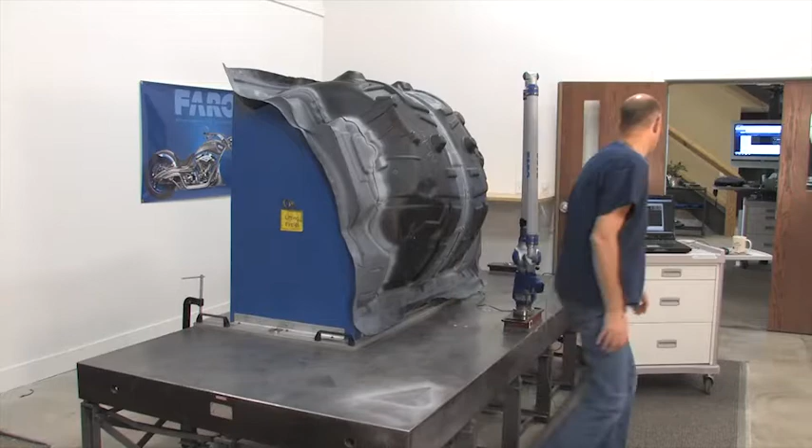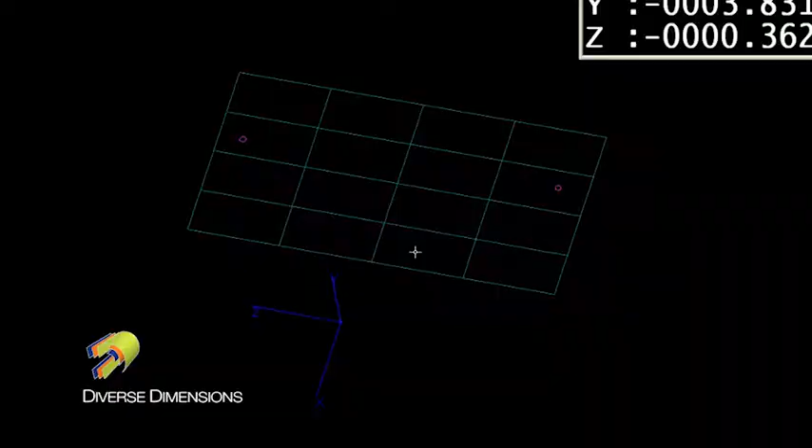Now notice on my screen here, I've got my plane measured, and I've got my hole, and I've got my slot. But notice the trihedron over here, this XYZ. I'll zoom around here a little bit just to show where that's at. That is right in the middle. If you can kind of see that right here, it's in the middle of what I've measured so far. Of course, it's the arm. It's the coordinate system that comes with the arm. CAM2 says it's the world. But what I want to do is I want to set the world to be the origin that the robot's going to see. Okay, so let's walk through that in the software here.

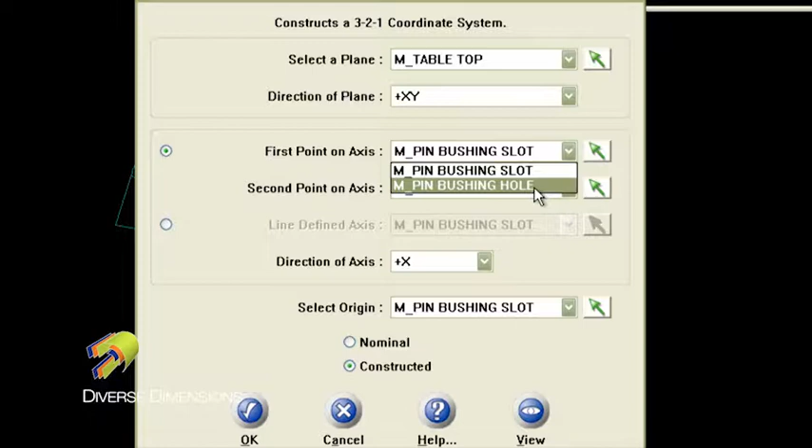If I go up to construct coordinate system, and then I run to 3-2-1 right there. What I do first is I select my primary as being the tabletop, and then I turn on this radio button right here. This second area, this dialog box, will show how we're going to set up the line, or the 2 component of the coordinate system. So what I'd like to do is I'd like to set up an axis through the hole and then through the slot, and I want to call that my plus X direction.

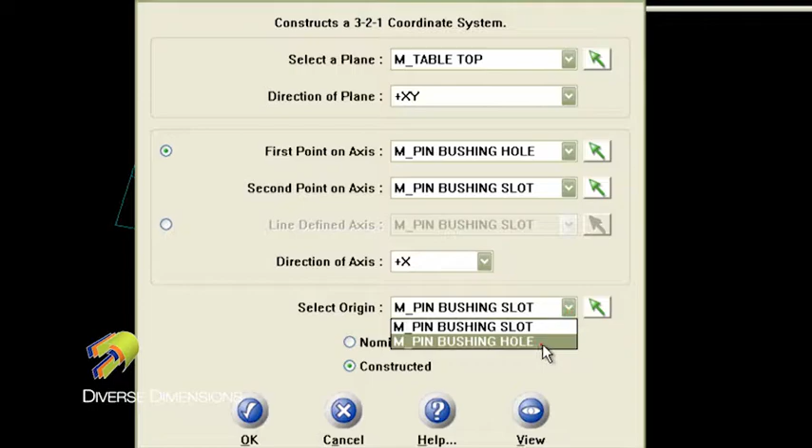I've got all kinds of options for that. But what I'd like to do is say that the hole on this side is going to be my origin, and the axis is going right through to the slot here in this direction being positive X. And then I would set my origin to the hole on this right-hand side and say OK. I usually like to name my coordinate systems as well, so let's call it 3-2-1 and say OK. Now notice what CAM2 did is it set up a coordinate system right here, right over top of where that hole is. Okay, I like that.

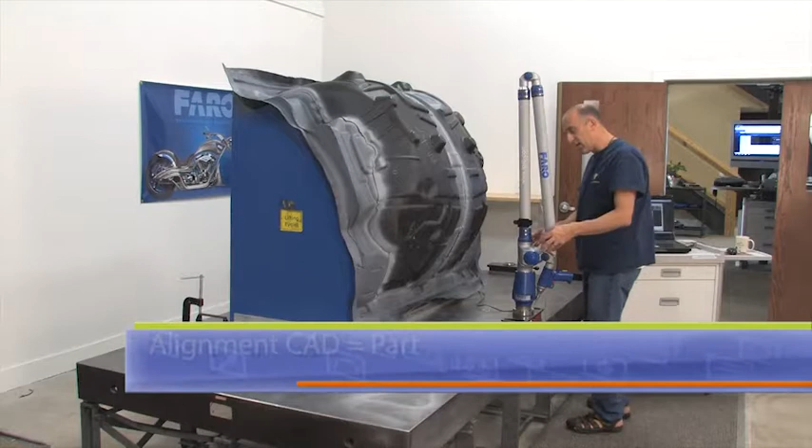But what I'd like to do is I'd like to fake the arm out. The arm still has a coordinate system that it thinks is 0. Let's move him over to that other coordinate system. So let's go to the alignment menu here, CAD equals part. Now, when I do the CAD equals part, what I'm doing is I'm taking the coordinate system, or the world coordinate system in the arm, and I'm going to move him physically to the origin over here of the 3-2-1. So let's take the measured coordinate system and say the world will move to it. We'll say OK. And then I'll call this alignment 3-2-1 as well and say OK.

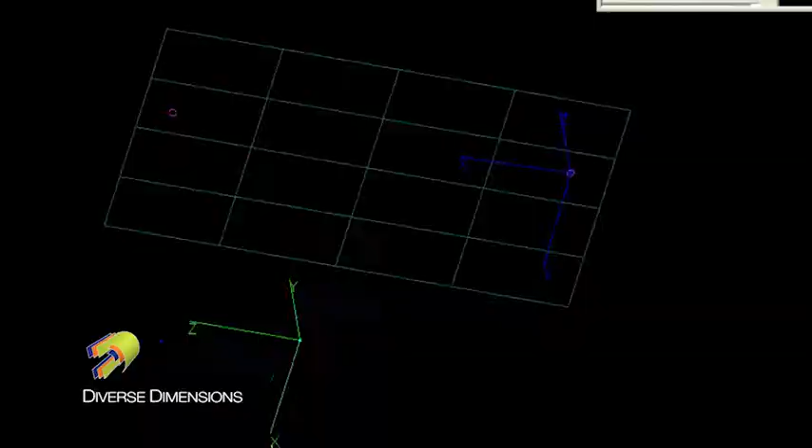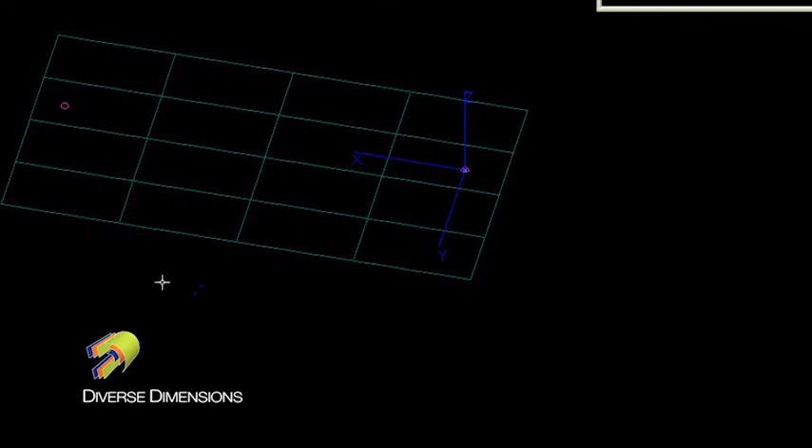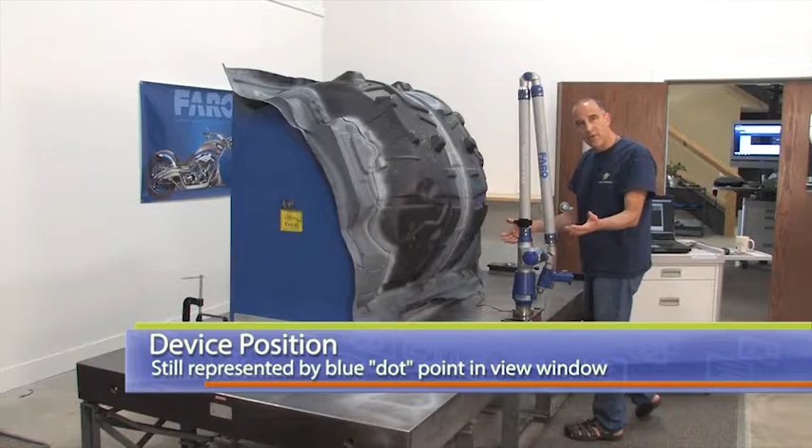Now it happened kind of quick in the back here, but let's rotate around a little bit. Notice now my trihedron here, the arm actually thinks it's here as well. The arm will say, okay, that's my 0 position because I've blended the world coordinate system to this position. But also notice, it might be a little bit tough to see, but right in here, I've got a blue dot yet. What the blue dot represents is the device position of the arm. It has to know where it came from before it took off and went to the origin here. So the device position will always stay in your view right here. Now I'll escape out of that.

But another thing I like to do is I like to prove to myself and to my client that I'm using his datum scheme. So if I'm saying that that pin bushing for the hole is truly my 0, I want to prove that. So you can see here that it truly is my X and my Y component is starting with a 0 here. And then the slot should have the Y component, of course Z as well, but the Y component will be 0 here too. So truly I'm in a 3-2-1 alignment and I'm bisecting right through that hole and that slot. And that's exactly what my client is doing with their robotic application too.

So 3-2-1, super easy. So try it on your own. And don't forget, always use the CAD equals part, to fake the arm out. Do the alignment of the arm to the origin that you've set up on your coordinate system.